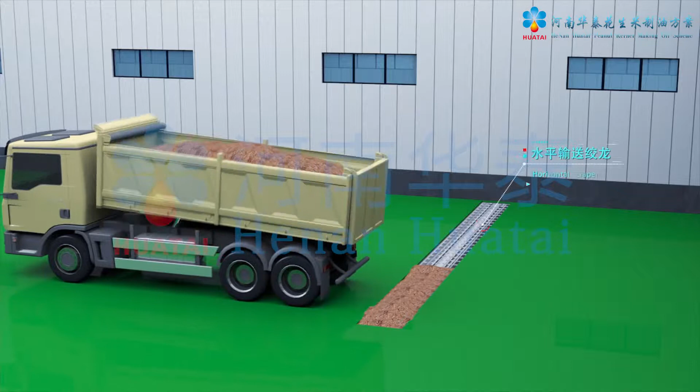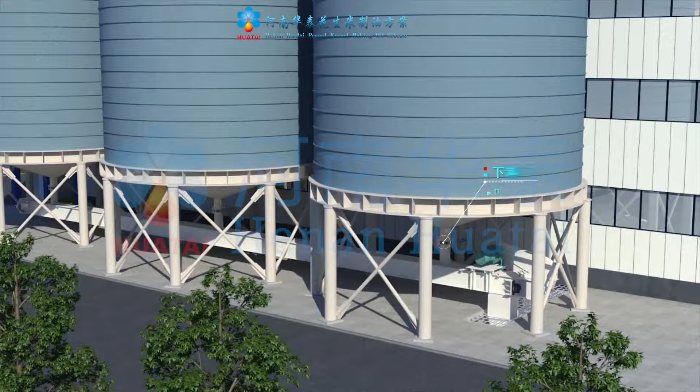Peanut kernels are conveyed to the daily silo elevator by underground horizontal scraper, then conveyed to the daily silo for storage. The discharge valve at the bottom of the daily silo is opened, and peanut kernels fall into the horizontal collection scraper, then are conveyed to the horizontal feeding screw conveyor.

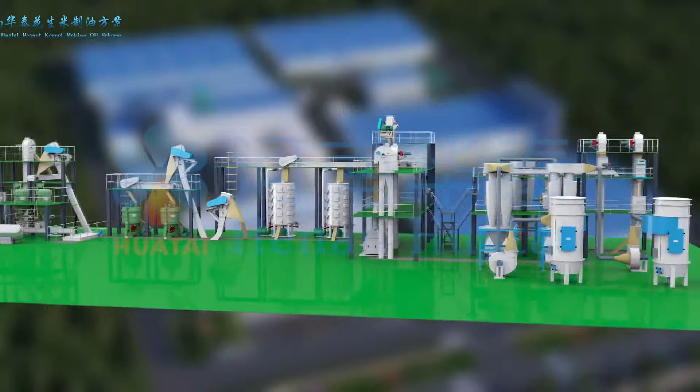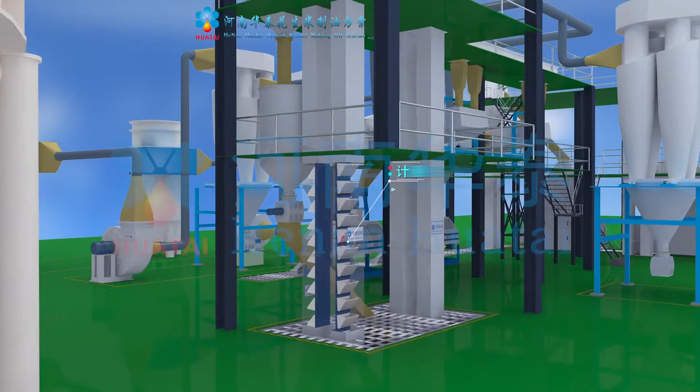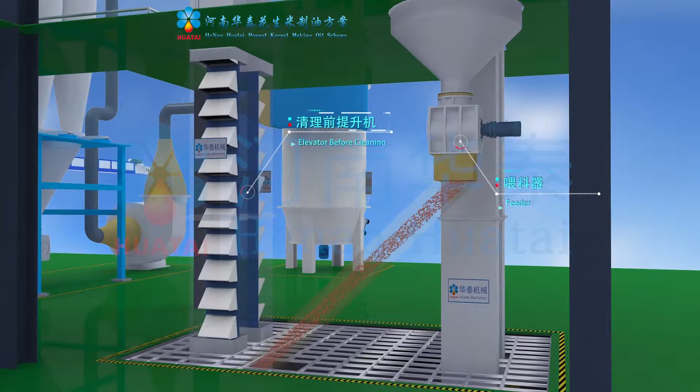Peanut kernels enter the metering elevator. After measuring the processing capacity accurately through the measurement scale and falling into the temporary storage tank, peanut kernels are conveyed uniformly into the elevator before cleaning, by feeder, through the self-cleaning magnetic selector to remove metal impurities.

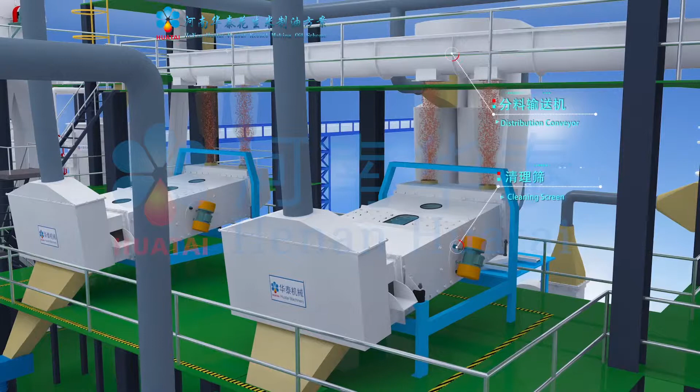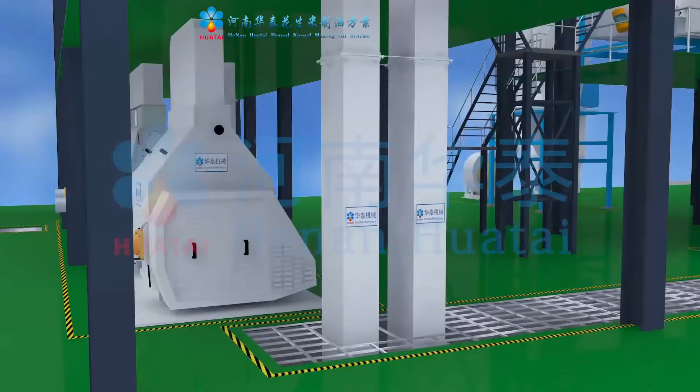Then peanut kernels fall into the distribution conveyor, distributed uniformly into the cleaning screen to remove organic impurities from kernels. The cleaned kernels enter the specific gravity destoner after removing impurities whose size is the same as kernels, fall into the collection screw conveyor, and convey kernels into the crushing elevator.

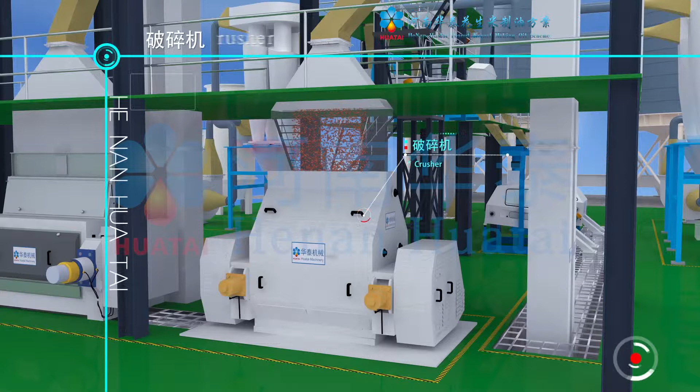A crusher is adopted to crush big-size peanut kernels into smaller ones uniformly. The crusher has double-paired rollers and a hydraulic device for automatic regulation, which ensures more uniform crushing.

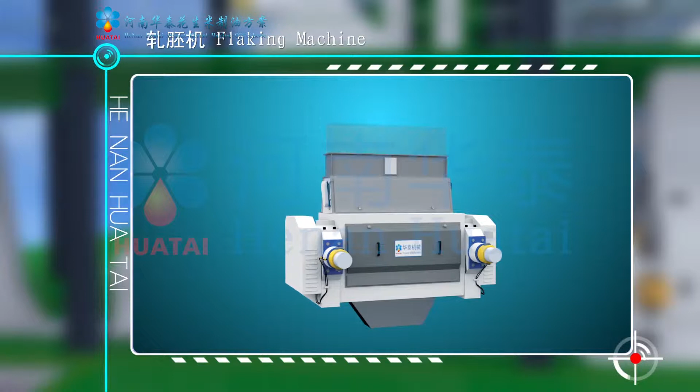Crushed kernels are conveyed into the flaking elevator by collection conveyor. The flaking machine adopts a hydraulic regulation device, which can adjust the thickness of flakes online conveniently and quickly, thus improving productivity of the later machines. Flakes are conveyed into the distribution scraper by the flaking elevating scraper to distribute flakes into the steam cooker.

The steam cooker has a layer-type structure, heating kernels by bottom and jacket to ensure high heating efficiency. Cooked flakes are sent into the distribution scraper by the elevating scraper and distributed into the oil prepress to press oil.

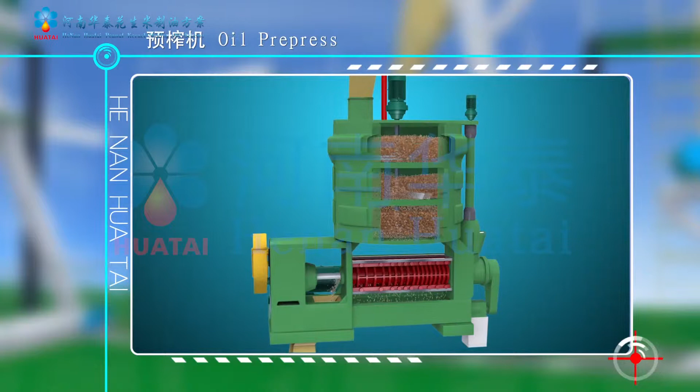The thermal insulation cooker is at the upper layer of the oil prepress, with the screw pressing device at the lower part. Flakes bear big extrusion force because of constant moving forward, pressing the narrowing pressing chamber, with space capacity changing from big to small. Oil is pressed out from flakes and discharged from the gap of the cage bars and pressing ring oil groove.

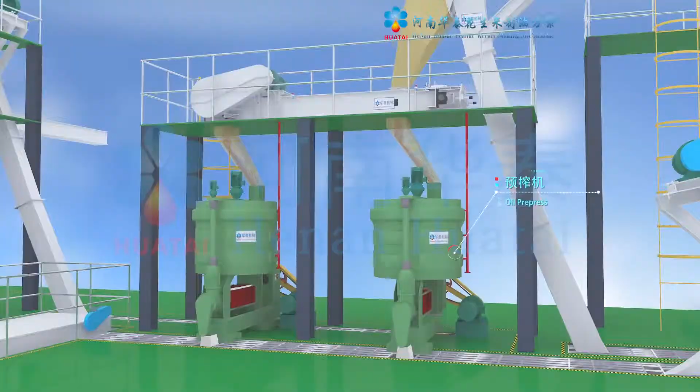The pressed cake is elevated into the extraction scraper by the cake discharging elevating scraper and then sent to the solvent extraction plant.

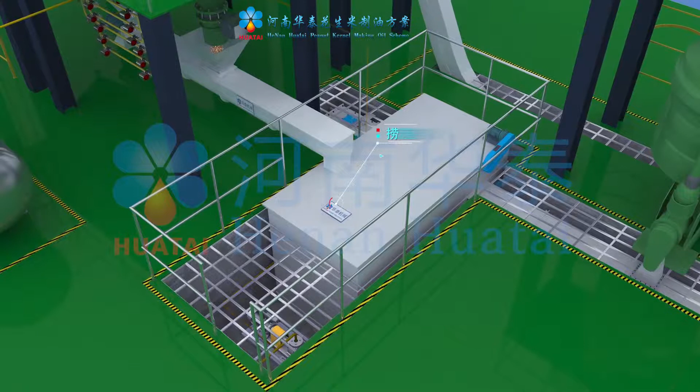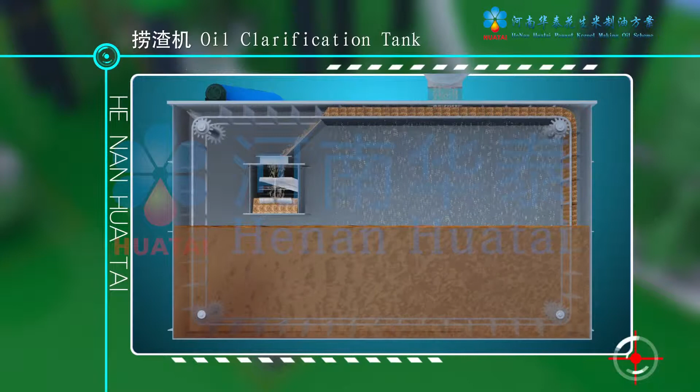Pressed oil goes through the oil residue scraper and separates cake residue out, then enters the oil clarification tank. The oil clarification tank adopts an automatic continuous residue dredging device to further separate oil residue from pressed oil. Crude oil is sent into the leaf filter by filtration pump.

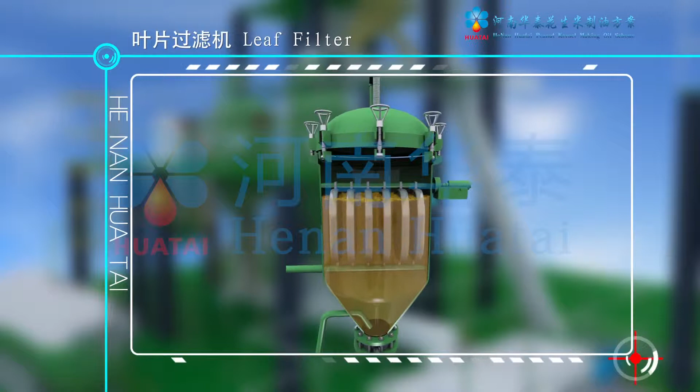The filter adopts a stainless steel filtration screen structure. After going through the filter screen, oil enters the filtered oil tank for temporary storage. Solid impurity is discharged from the discharge outlet and sent to the oil residue screw conveyor for collection.

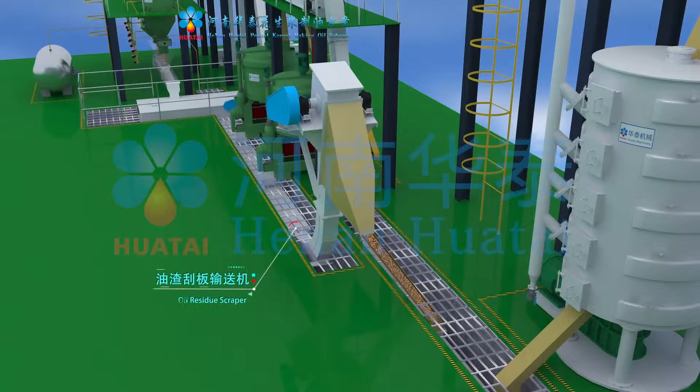It then enters the oil residue scraper. Oil residue is sent into the pressing conveyor by the oil residue scraper to be pressed again. Filtered crude oil is sent to the tank area for storage or to the refining plant by pump.

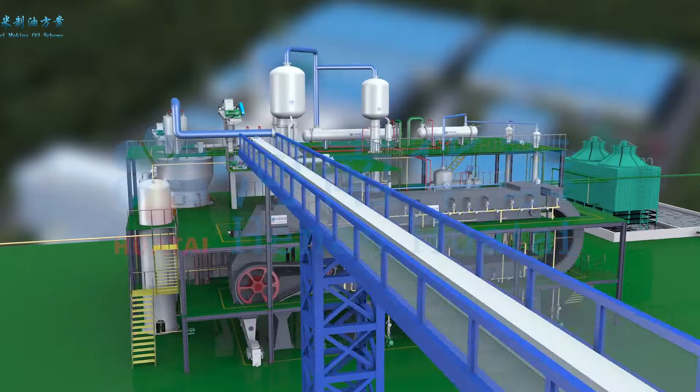Pretreatment materials will be sent to the sealed spiral conveyor by horizontal scraper conveyor, by horizontal sealed screw conveyor. The material needed to be extracted will be sent into the material starter tank through conveyor.

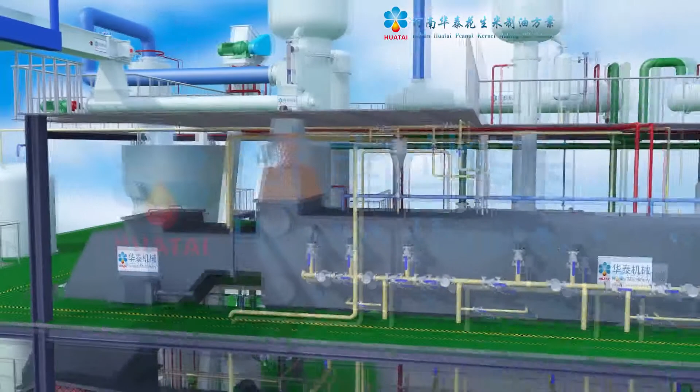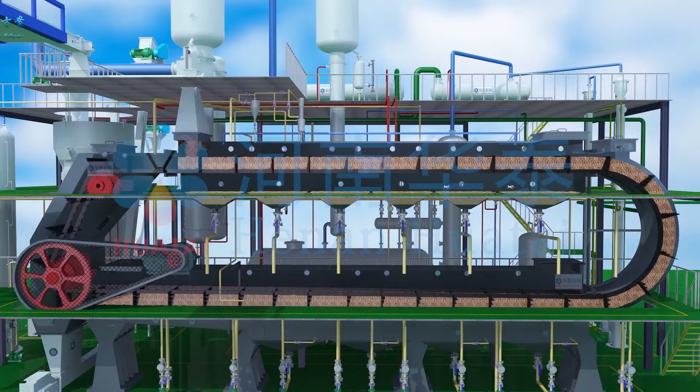There is a radar material level control system inside the material starter tank; this system controls the rotocel extractor frequency motor speed, and ready-to-extract material will be arranged and reorganized. The rotocel extractor interior design includes a material level adjusting and anti-penetration device. The material runs a circumference and is then discharged through the outlet.

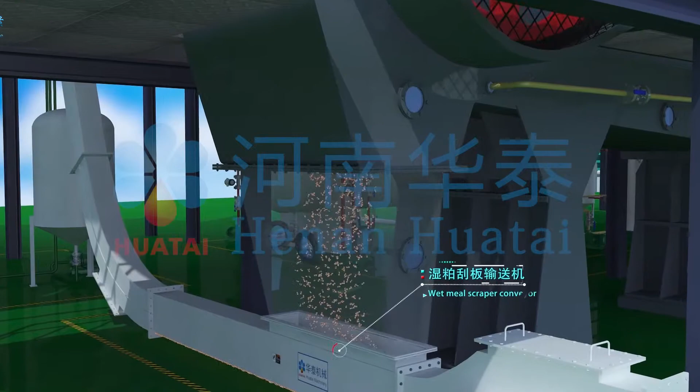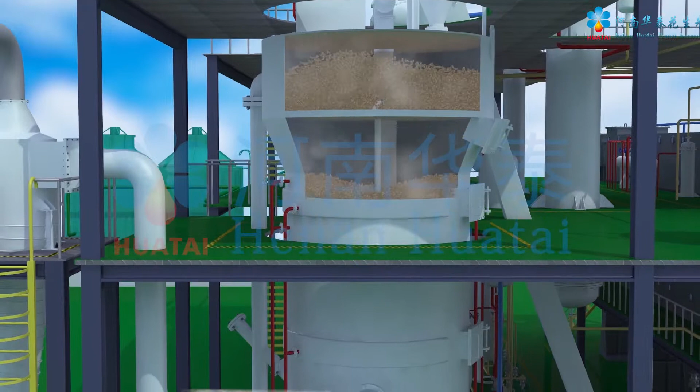The wet meal will be elevated into the wet meal sealed screw conveyor, and the sealed screw conveyor will send the wet meal into the DTDC desolventizer, where the DTDC desolventizer is composed of the pre-desolventizing layer, drying layer, and cooling layer.

Each layer has automatic material level control designed in. The material meal will be discharged into the meal discharging scraper conveyor, and the discharged meal will be elevated into the meal library.

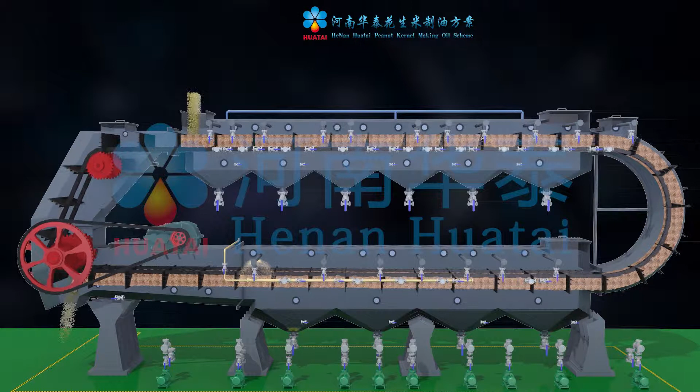High-purity solvent is sprayed into the rotocel extractor by the first-stage spray system. Sprayed material enters into the drip-dry section of the extractor.

The low-concentration mixed oil in the bottom of the first frame back bin is pumped by the number 1 solvent pump and sprayed to the top of material in the second frame back bin, and so on. Low-concentration mixed oil is sprayed circularly.

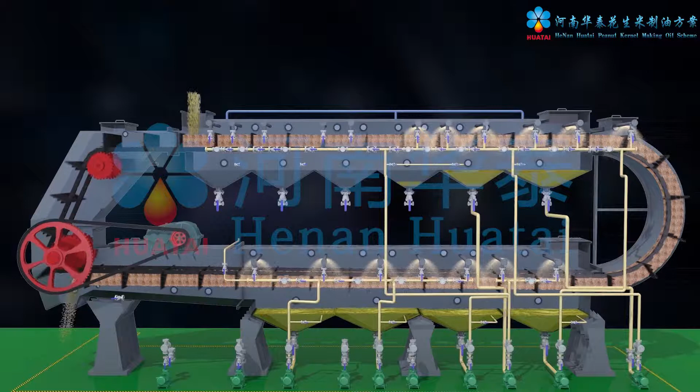The oil concentration of the solvent decreases and the mixed oil purity increases. High-concentration mixed oil comes from the bottom of the second frame, which is on the top of the rotocel extractor.

It is pumped into the mixed oil centrifuge, goes into the mixed oil continuous filter after removing big impurities, then goes into the mixed oil temporary storage tank after removing small impurities from the oil.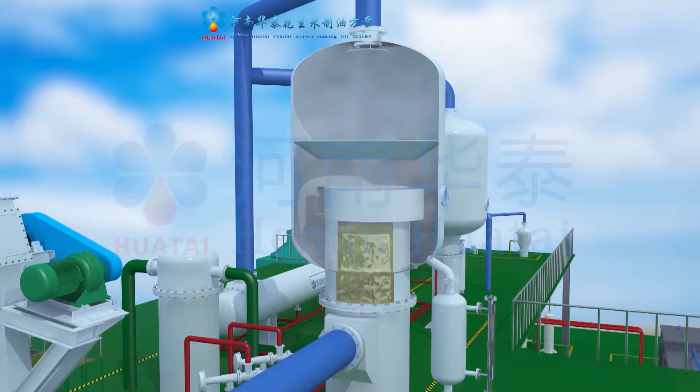The mixed oil presents a rising film state when it goes through the stainless steel tubes. The solvent gas is separated by the vapor-liquid separator on the top of the pre-evaporator. After first-time concentration, the mixed oil goes into the temporary storage tank.

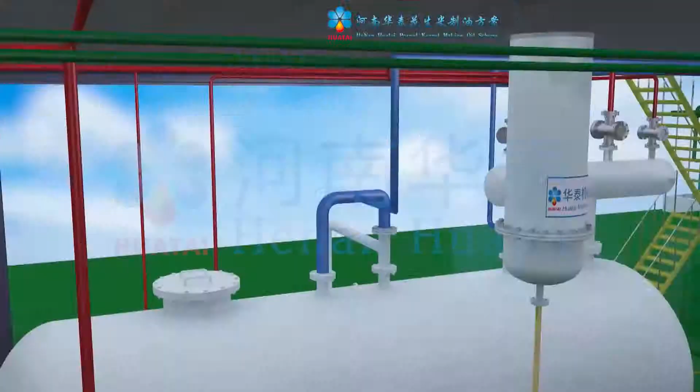The number 1 evaporator extraction pump sends the mixed oil to the heat exchanger. After that, the oil is sent to the number 2 evaporator. This evaporator is heated by indirect steam.

The mixed oil presents a rising film state when it goes through the stainless steel tubes. The solvent gas is separated by the vapor-liquid separator on the top of the number 2 evaporator. After second-time concentration, the mixed oil goes into the temporary storage tank, and is then pumped to the steam stripping tower by the number 2 evaporator extraction pump.

Through a disc shunt inside the steam stripping tower, the mixed oil forms thin films on the stainless steel disc, and the extracted crude oil is further concentrated to achieve the state standard.

The extracted crude oil from the steam stripping tower is conveyed to the oil heat exchanger by the steam stripping extraction pump. After the heat exchange, it is sent to the crude oil temporary storage tank.

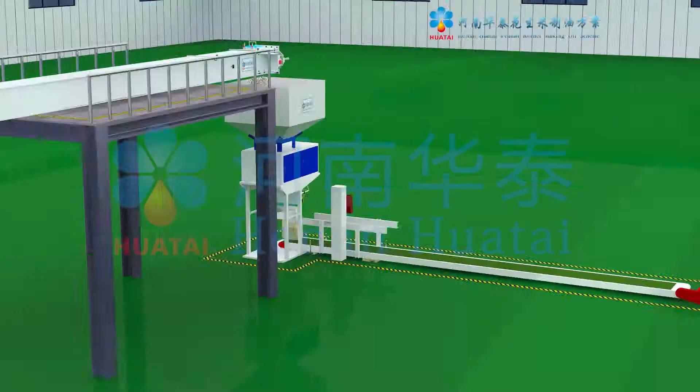The meal from the extraction plant is sent to the packaging scale by the horizontal scraper conveyor and packed.

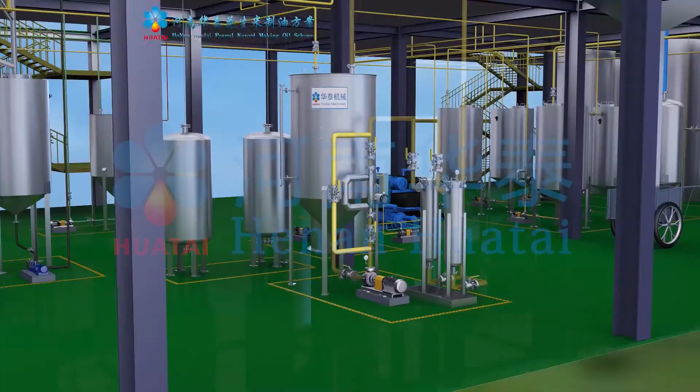The extracted crude oil goes into the refining plant and is temporarily stored in the crude oil tank. The crude oil pump then pumps the oil into the crude oil filter.

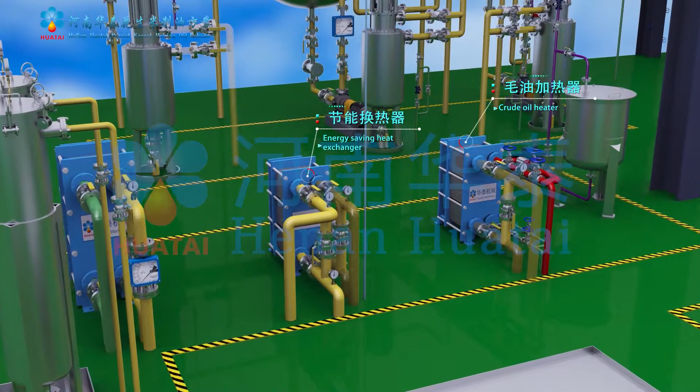Filtered oil goes into the energy-saving heat exchanger. Dry oil and the crude oil exchange heat, then is sent to the crude oil heater. After the temperature rises, the crude oil goes into the oil-acid mixer.

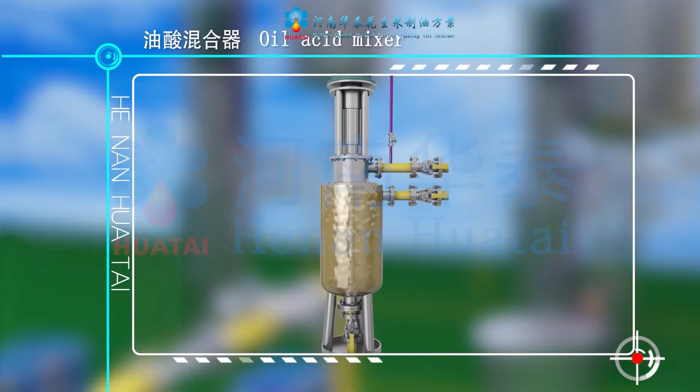Ratio-measured phosphoric acid inside the mixer intensively mixes with the oil. The acid-refining oil goes into the acidification tank to undergo the delayed acid refining reaction.

The alkali-refined oil is sent to the alkali oil heater by the pump. After the temperature rises, the oil is sent to the degumming centrifuge.

By high-speed centrifugal separation, the soap is separated from the alkali-refined oil and recycled by the Nigri tank on the first floor.

The alkali-refined oil enters the oil-water mixer after intensive mixing with ratio-measured water.

The oil enters the dehydration centrifuge. With high-speed centrifugal force, the soap water is separated and sent to the comprehensive water knockout tank to be processed.

The oil enters the drying oil heater. After being heated, it goes to the vacuum dryer.

The vacuum dryer machine works with the vacuum system. The moisture inside the oil is rapidly removed and dried, and then the oil goes into the decoloring oil heater.

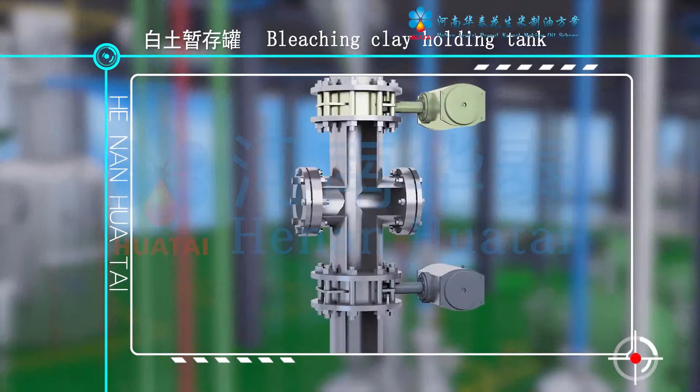The clay will be added to the pre-mixed tank after being measured by the clay dosing system.

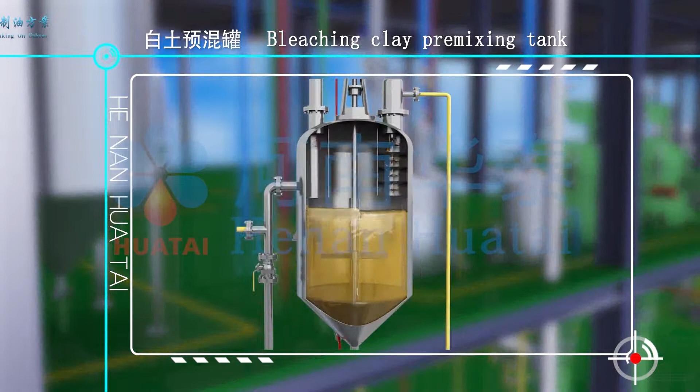The clay and oil are fully mixed in the pre-mixed tank under vacuum. The mixed oil enters the decolorization tower.

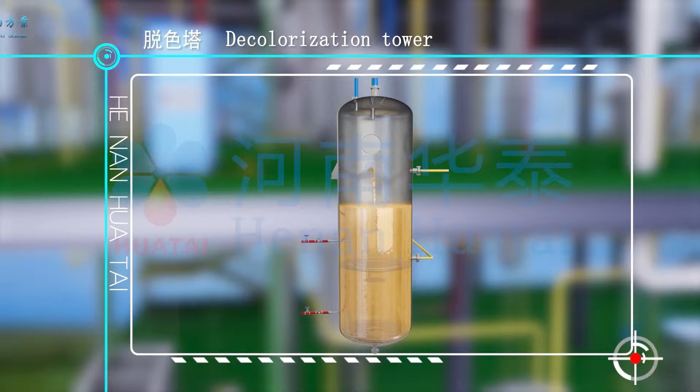The tower, matching with the vacuum system, adopts a layered structure. Dry steam stirring makes the clay and oil fully mixed.

The mixed decolorization oil is transported to the leaf vibration filter by the decolorization oil pump.

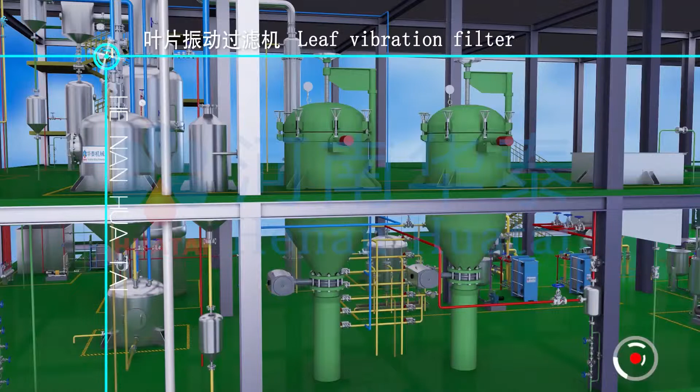The leaf vibration filter internally adopts stainless steel 304 mesh. The decolorization oil passes through the strainer and is exported by the oil conduit.

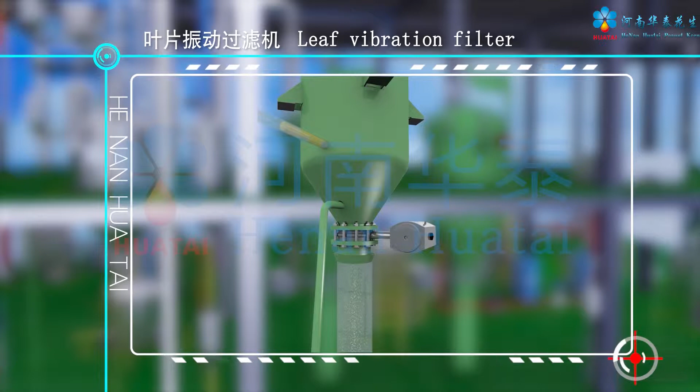After that, compressed gas is blown to dry the clay. Then the discharge valve at the bottom of the filter opens to discharge the waste clay to the temporary storage room on the first floor.

Decolorization oil goes into the back filter to undergo secondary filtration. Filtered oil goes into the gas cylinder to remove air under vacuum state.

Then the gas extraction pump conveys the oil to the oil heat exchanger to exchange heat with the deodorization oil. After that, the oil is sent to the conduction oil heater to exchange heat with high temperature oil,

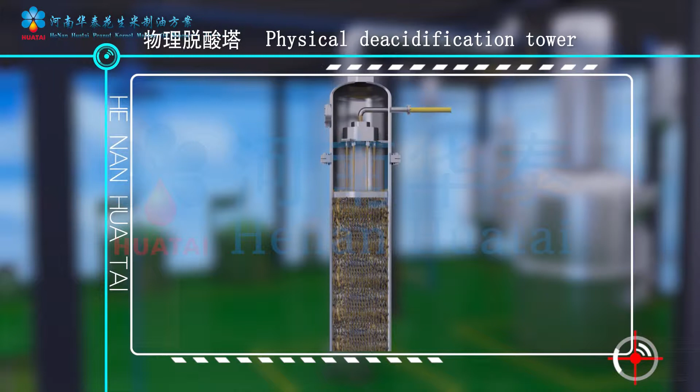and then enters the physical deacidification tower. After the deacidification oil enters the tower, the grease separator equally separates the oil and the oil drops into the corrugated packing. The oil forms a thin film on the packing.

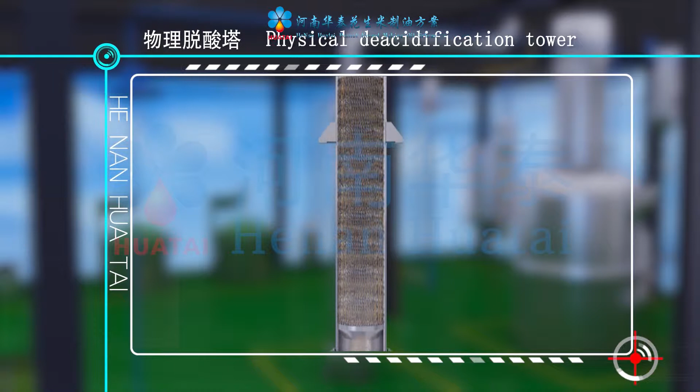Fatty acid vaporization occurs inside the tower. The fatty acid gas is extracted by the vacuum system and sent to the condenser for condensation recovery.

The deacidification oil is conveyed to the conduction oil heater by the oil extraction pump to get secondary heating, and then transported to the physical deacidification and deodorization tower.

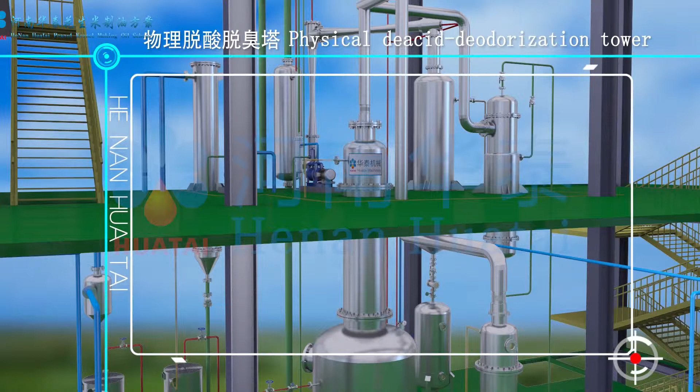The physical deacidification and deodorization tower structure combines the deacidification tower and the deodorization tower. After the secondary deacidification on the top, the oil flows to the deodorization tower at the bottom.

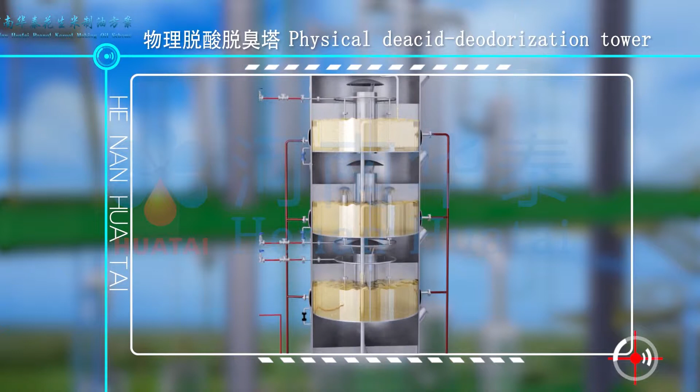The mammoth pump ejector design inside the deodorization section promotes full contact between the oil and the steam, separating the light constituent gas from the oil in the high vacuum system.

the oil enters the oil plate heat exchanger, and finally comes into the oil water cooler. After polishing by the polishing filter, the cooled deodorization oil enters the deodorization oil temporary storage tank.

Then it is pumped to the product oil tank area or filling plant.

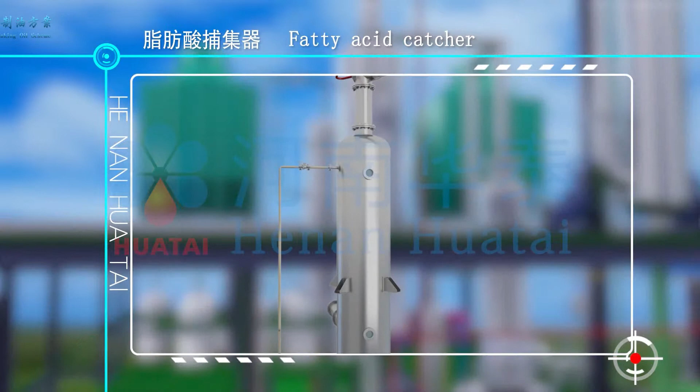The fatty acid gas from the deacidification tower and the deacid-deodorization tower is conveyed to the fatty acid catcher. After centrifugal separation, the fatty acid liquid from the fatty acid recovery system is extracted from the fatty acid gas.

The fatty acid liquid is recovered to the temporary storage tank. Through the fatty acid pump, it is sent to the outdoor fatty acid tank.

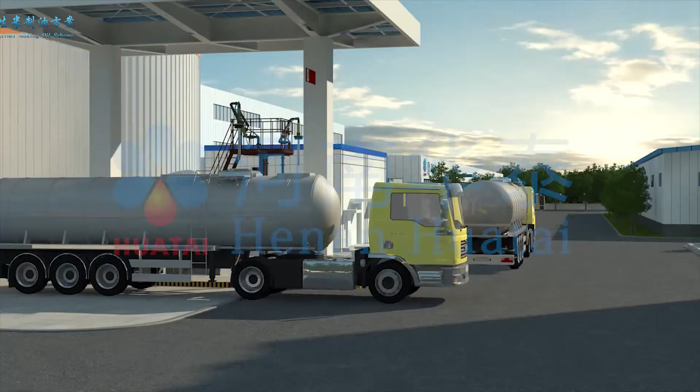Bulk oil in the tank area will be filled after measuring by the oil discharge system. Product oil is packed by the filling machine into bottles.

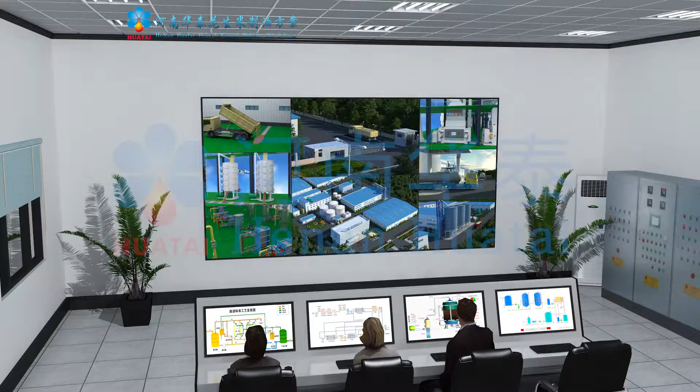An automation control room is set inside the plant area. The production line is controlled by the PLC system to complete production.